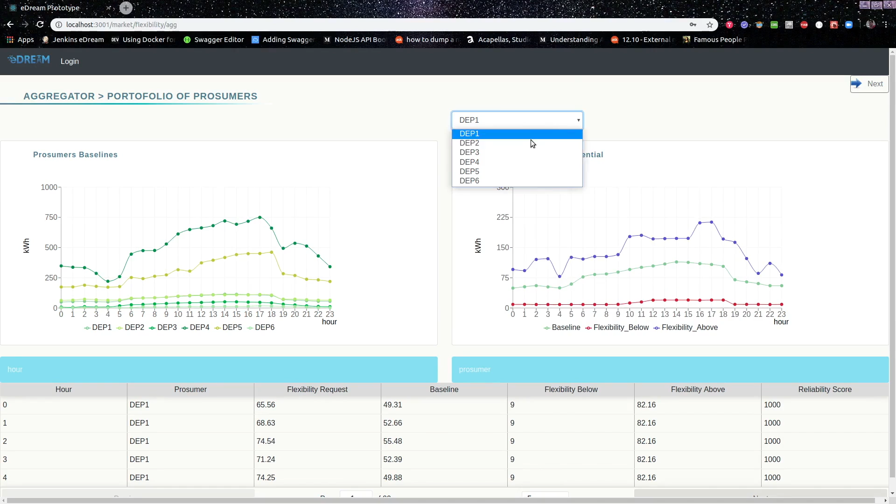In the case of the aggregator, the aggregator is able to evaluate the potential of each prosumer in its portfolio. So it can check the flexibility potential above and below the baseline. He can check the baseline of the prosumer. Then, based on the flexibility request received from the operator, he is able to construct the flexibility delivery based on the portfolio and the amount of flexibility that could be aggregated from its prosumers.

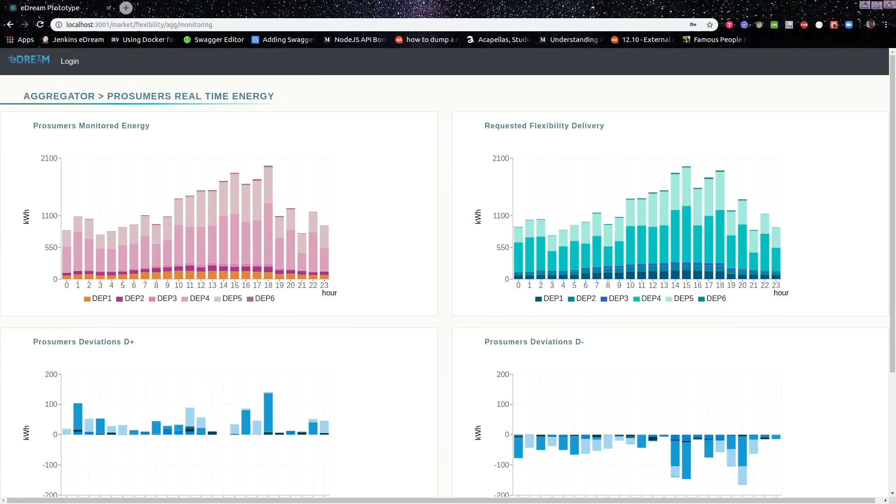Using the smart contracts and the blockchain, this is automatically injected in the smart contracts of the prosumers that regulate the prosumers' behavior. And in near real-time fashion, it is able to assess the amount of flexibility delivered by each individual prosumer and also the deviations from the expected amount.

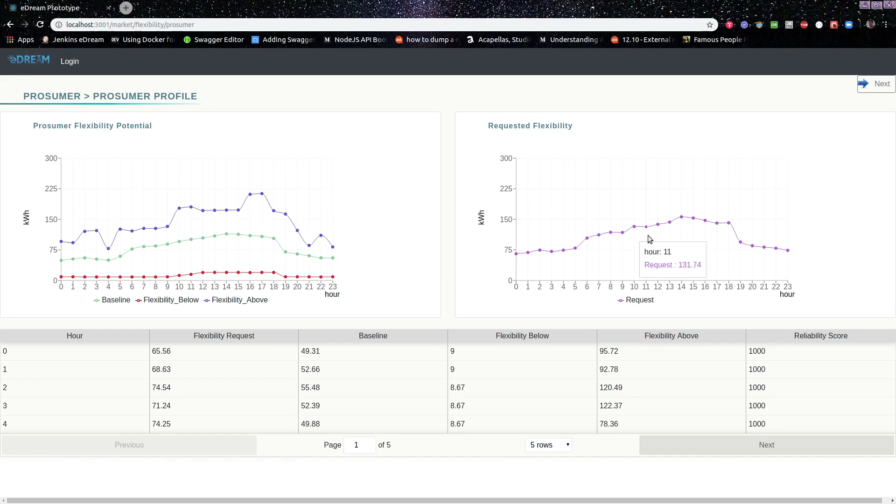In terms of the prosumer, the prosumer can have multiple options. In this case, he can see his baseline and estimated flexibility potential. He can see the flexibility request injected by the aggregator in his contract. And during delivery, the monitored energy data are registered on the blockchain.

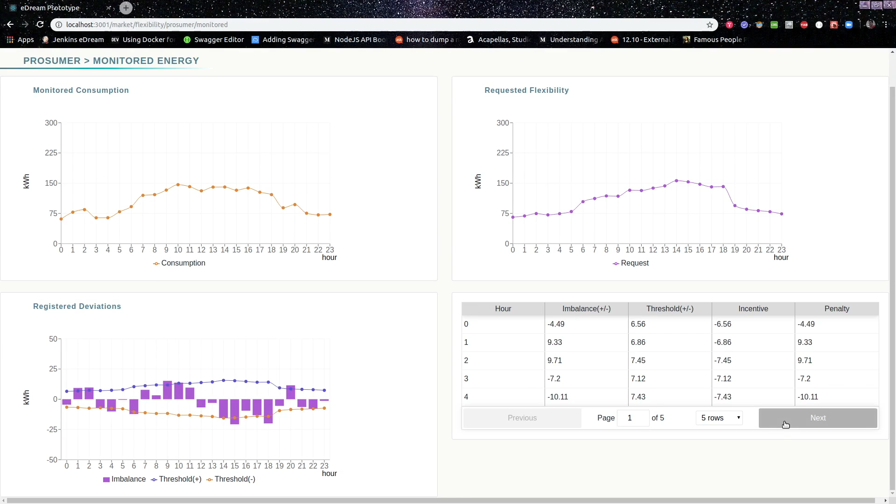Based on that information, the assessment of the deviation compared to the required flexibility is done in near real time, and also in near real time the settlement of energy imbalances and the financial settlement of the service is done. Okay, so this was my fast-forward demo presentation.

You want to play the other one, or you're finished? No, it's okay. I think the main ideas are presented. So there's no questions from the audience. I'm just curious, is that going to be open source, or is the prototype you're demoing a commercial platform? It will be open source, and the demo that you have seen is based on the Terni pilot.

So in the Terni pilot, we are testing these functionalities of having blockchain as a technology for decentralized control. Of course, there are challenges because blockchain is well known that it is not that good in terms of scalability and privacy of the data, but we have managed to overcome these problems.

We have developed some second tier solutions, they are called, based on blockchain, that achieve very good scalability, and also for the privacy of energy data, we have successfully integrated zero knowledge proofs, allowing the validation of the service to be done without disclosing the energy consumption data of the prosumer.

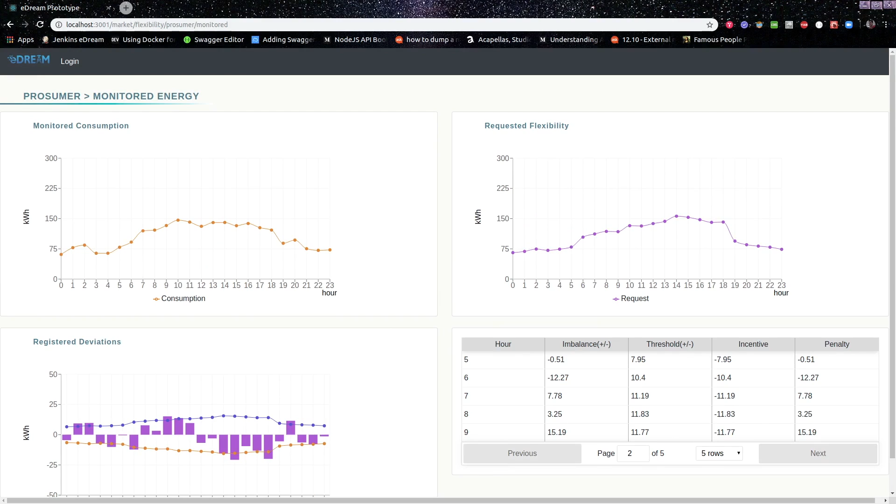All right, wonderful. So next up, we have Emmanuel Onillon from CSEM, which is the Swiss Center for Electronics and Microtechnology, and he will be presenting the TABEDE project. Thanks, Zia. So, the TABEDE project, let me put my presentation in full screen.

So, first I will give a quick overview of what TABEDE is about, why TABEDE, what is the context around, a brief overview of a proposed technical solution, what are our test plans, and what would be our next steps. So TABEDE is a 3.5-year project funded by the EU, and the main goal of TABEDE is to allow a building equipped with a building management system or energy management system, or without a building management system, to be able to integrate energy grid demand response schemes. So to make buildings demand response ready. That's the ultimate goal of TABEDE.

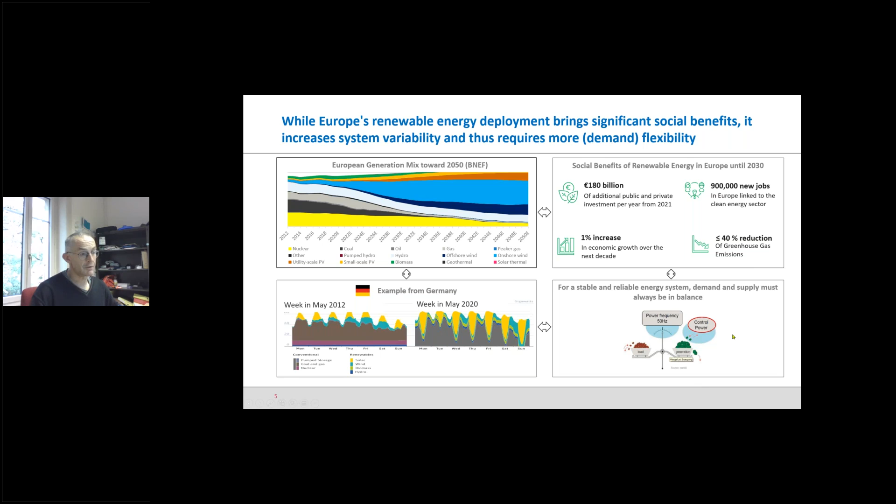But with all this power, we need to find a good equilibrium between generation, load, and storage. And this is why we need TABEDE. We have plenty of buildings that cannot enter demand response schemes, that cannot take advantage of their flexibilities, and that's what we would like to achieve thanks to TABEDE. So the main goal is that consumers can support the grid by valorizing their flexibility and local assets. In the near future, there will be more and more flexibility, more and more deployed small-scale batteries, or even batteries in electric vehicles. And TABEDE would like to allow the consumers to take advantage of that.

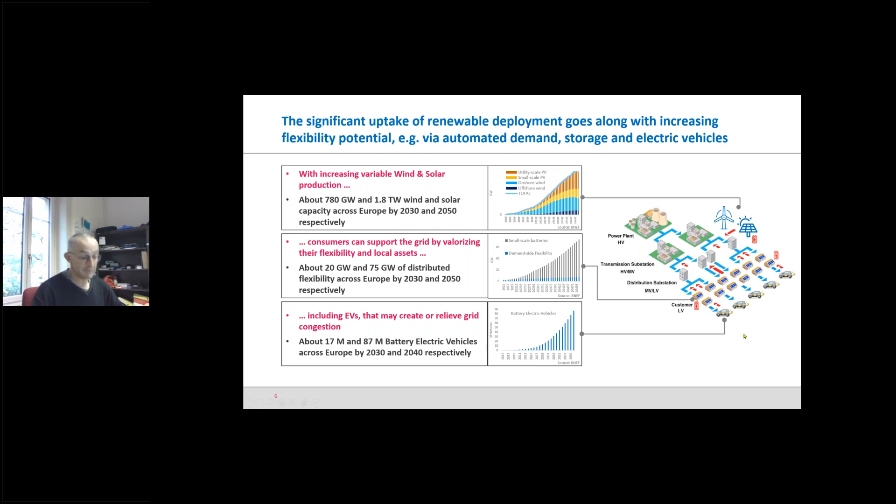What is our proposed technical solution? We are developing what we call a TABEDE extender, to extend existing building management systems. For that, the extender has 4 main objectives. At the end of the project, we target TRL 7. So we won't have a product, but it will be really validated on our 3 main test sites.

So one keyword in TABEDE is interoperability. We discussed a lot yesterday morning about interoperability. So the idea is that TABEDE can discuss with several demand response communication protocols. It can easily be deployed in the cloud and can easily discuss with several appliances.

Thanks to that, we shall be able to improve demand response capabilities. So we would like to be able to send set points to existing appliances. We want to create a database of appliances so that when someone deploys a new appliance, we can fetch the driver for that appliance, and so that that appliance can take part in the demand response scheme. And we have all the communication protocols stored in that database. We are currently validating TABEDE on 3 test sites, and it's already working well on 2 out of 3.

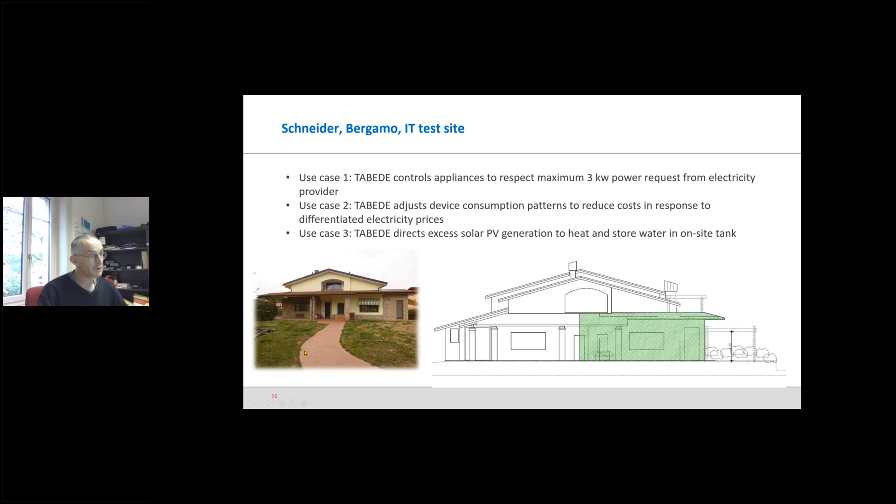Second test site, Bergamo, Italy. A residential building, we have different use cases. The first one is a law in Italy: we have to respect a maximum 3 kilowatt power request from the electricity provider. Then we want to adjust the building consumption, and then we want to decide what to do with the excess solar PV generation. In this building, there's a large water tank in which we can store energy.

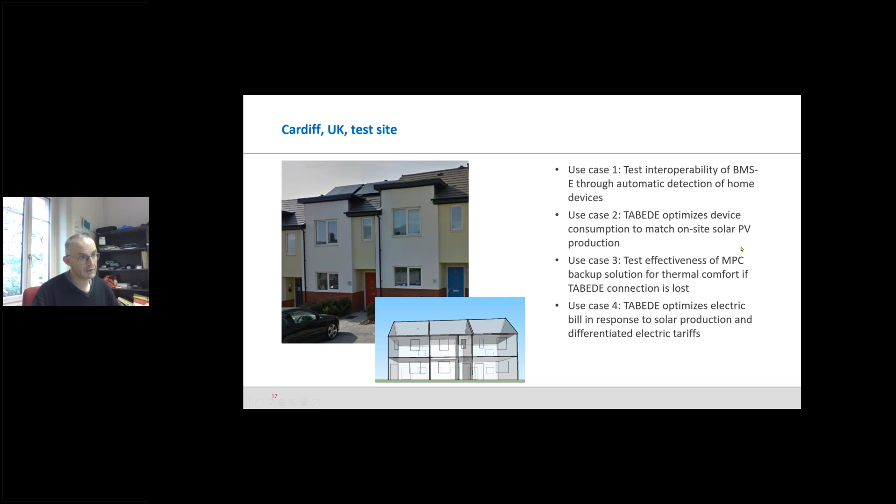Last test site, the Cardiff building, in which we have also 4 different use cases. So here, of course, we want to see how the building will behave with respect to demand response orders, but we want also to validate the model-based predictive control solution.

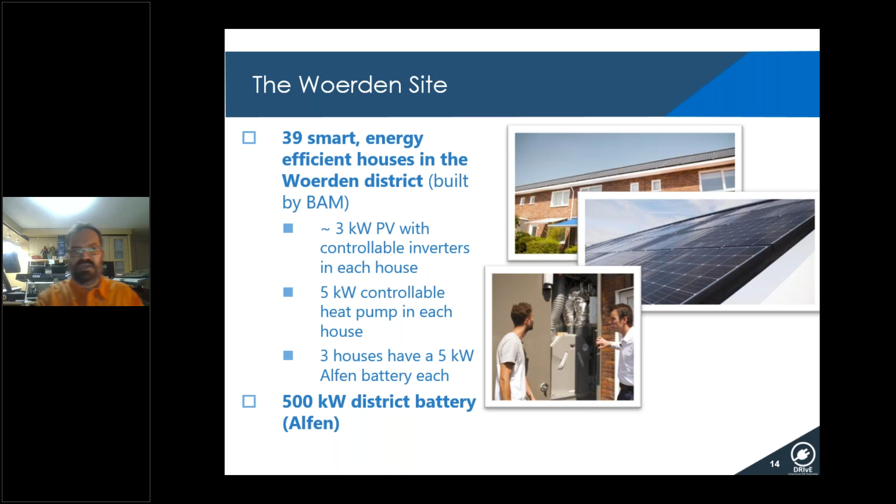So I mentioned the Woerden site has 39 smart houses. They look like this. They have PV panels, each house 3 kilowatts. The inverters are controllable, but initially we were not allowed to control them. There are 5 kilowatt controllable heat pumps, and some houses have Alfen 5 kilowatt batteries, and there was also a big district battery installed, 500 kilowatts.

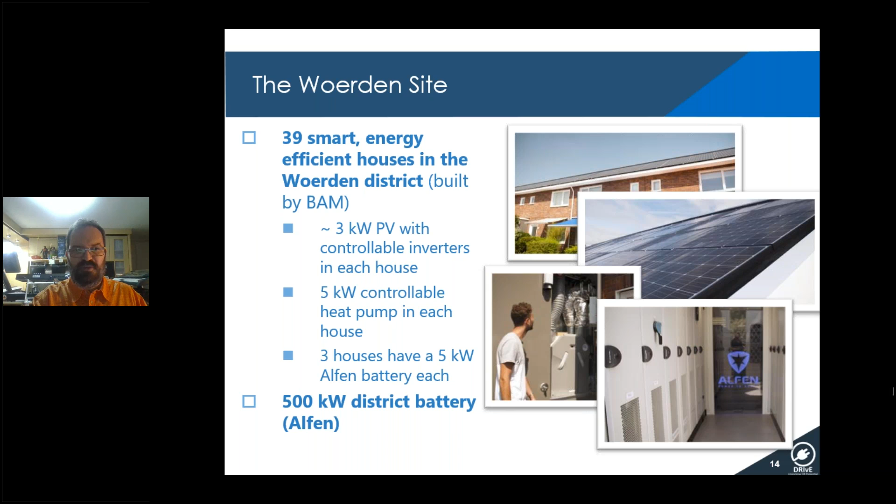When you need to implement DR, one of the biggest problems with implementation is that you claim that you can do everything, and you are supposed to then simply start testing it. But there is a big reluctance by building owners, site operators, everybody, whether this physical testing will work as planned. So if you look at physical testing like this, we have our drive with all the DR capabilities, additional services, and you then have to control physical devices through your gateway. These are usually Modbus controls, and of course you have human beings interacting with these devices and setting the reference values for indoor temperature, etc.

When you do physical testing, there is a possibility that your actors may get angry because there's no hot water and they want to take a shower. But that's not the biggest issue. They will forgive you after some time or forget. There's also a possibility that due to unplanned behavior of your control algorithms, you can fry the inverter. The inverter can catch fire and then you can damage stuff. The digital twins proved crucial, at least in some pilot sites, to de-risk and provide confidence to site owners that everything is going to work.

So when we say digital twins, some people would call it hardware in the loop or hybrid cyber-physical testing. So we have the same infrastructure, the drive logic is the same, execution platform is the same, gateways are the same, but instead of real pilot sites, you are controlling the validated models, digital twins of all the assets that you can control in the pilot sites.

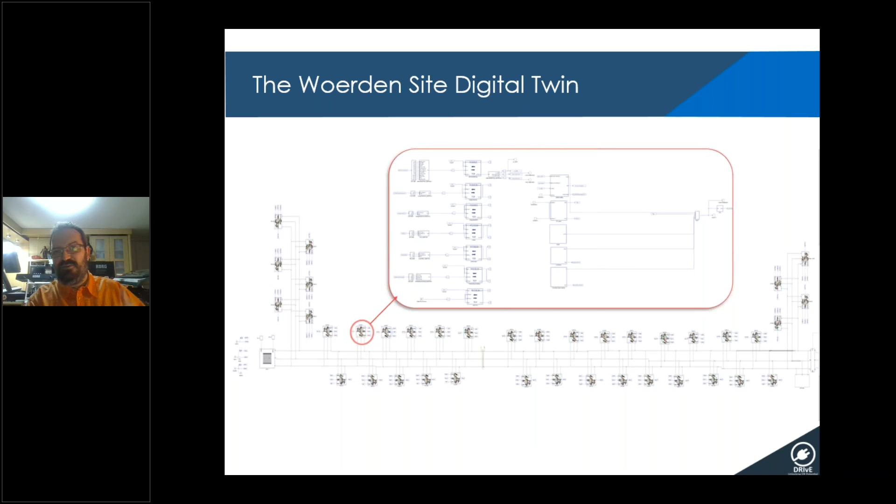So for the Woerden model, this is what the model looks like, but on the surface. Each house is one block, but when you click on each house, this was done in Typhoon software, but runs in Enervalis premises, you actually have additional signal processing and the models of inverters, models of heat pumps, etc., together with control logic. And this is what it looks like at Enervalis premises.

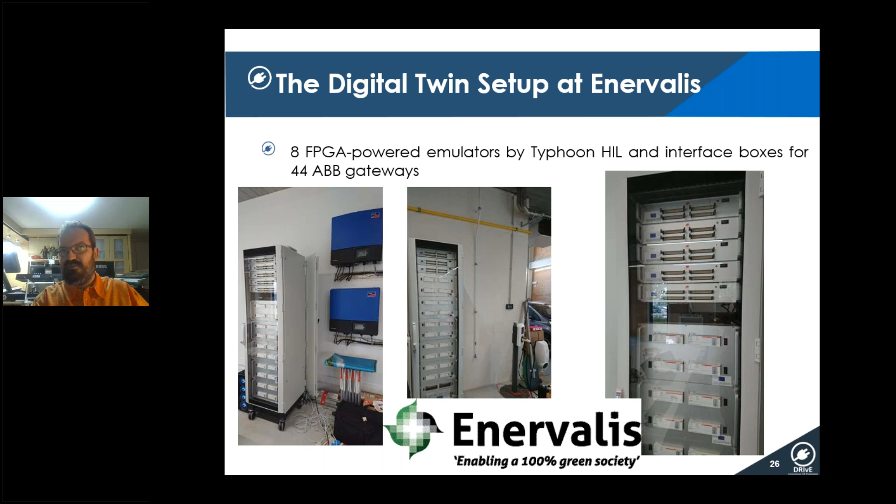So we have real-time emulators with ABB gateways that you use at real pilot sites. So the top layer are emulators, the lower layer are gateways. So the drive in the sandbox mode thinks it's controlling the real assets, but it's controlling actually the models. So this setup allows us to run parallel models, to try portfolio management changes, to do benchmarking, etc.

And then we can visualize everything in Grafana. We can see test results in Allure. We set up everything so that it's remotely available to all partners through GitLab Pipe Runner. You just say, I need a COMSA model for 2 days, run it, and you run your MPC or mass optimization there.

And for example, for Woerden, this is how we did congestion management, frequency control, voltage control, power quality, with 39 houses, so that there was a confidence that we should be allowed to control inverters, for example, which was not originally planned. The similar thing happened with the COMSA building, where the building manager wanted to see in the digital twin that our control messages will not mess up the building management system, and we managed to prove it to the building manager.

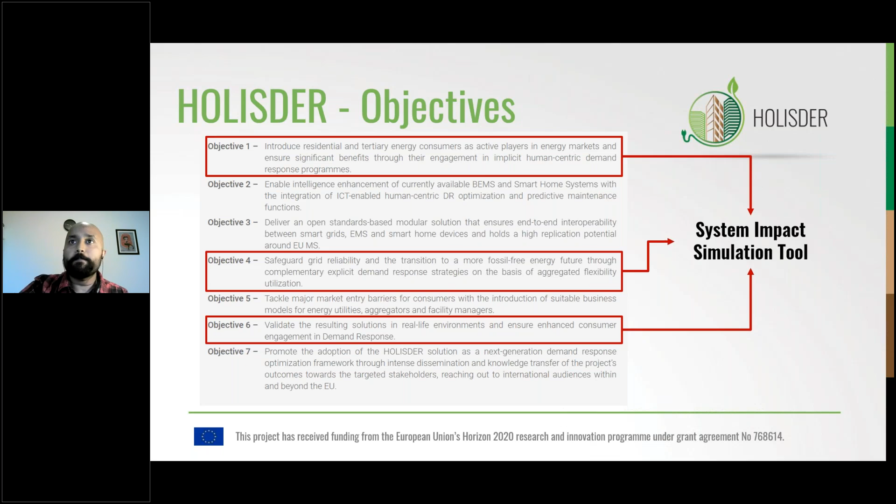Our motivation, yes, I think this is something that is more known to everybody who are working in this domain. We are moving towards a carbon-free system, both in the transmission side of the electricity network and the distribution side. Within the distribution side, one of the things we see are the adoption of a lot of technologies like PV panels, micro CHPs, batteries, etc., by residential and commercial users.

What happens as a result of this is distribution system operators expect to see increases in operational issues such as power quality management, like over and under voltage issues, congestion management, handling overloading of assets, etc.

One of possible solutions to mitigate this problem is automated demand response, and then that being done to flexibility sources within the distribution network. Among all the flexibility sources within a distribution network, this particular use case that I'm going to demonstrate focuses on commercial buildings as a potential source for flexibility in the distribution network.

Why commercial buildings? Well, they account for around 11% of the total energy consumption in the UK and EU, and 18% in US. This is according to statistics from 2003. You can easily assume that within the years that has passed since this data collection, the energy consumption has only increased. HVAC, which stands for heating, ventilation, and air conditioning, accounts for 50% of this energy usage within the

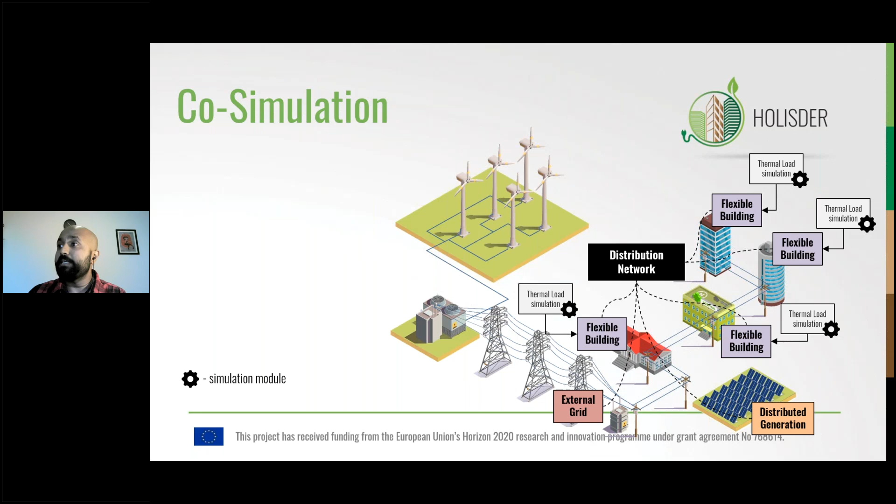The flexible buildings would take that information and convert that into a sort of flexibility that the aggregator can understand. The aggregator, having aggregated all of this flexibility, then talks to the DSO by means of a grid simulation. A grid simulation gives the DSO an insight into the state of the physical distribution grid itself, and the aggregator in this case is responsible for

balancing the network as well, so determining how much energy is to be imported from the external grid, how much of it can be used from local production, and it determines a sort of demand supply solution which balances the distribution network. This solution leads to consumption or production of many different flexible assets within the distribution grid, and this actuation is actually fed into a grid simulation so that the DSO can observe what happens to the state of the network if this demand supply solution was actually actuated.

The aggregator and the DSO then take part in a sort of iterative communication with each other, where the DSO observes the grid simulation and identifies if there are voltage problems in any part of the network and informs the aggregator, hey, there is a problem on this part of the network, do something about it. The aggregator, with information about flexibility in that particular node, can actually tweak or change the actuation at that particular node, perform a new balancing, and then feed this information again to the grid simulation.

Now this whole step repeats again for the next time step, which is maybe an hour or 15 minutes, depending on how often flexibility needs to be aggregated within this simulation. A small introduction to the technologies we are using within this simulation. As I said, there were 3 simulation modules that we depended on.

ESSIM is an open sourced simulation tool and collection of models which was developed by TNO and open sourced recently. It is a discrete time simulation tool. What it does is it calculates energy flows and performs balancing of multi-commodity networks. In this particular instance, we are using this feature of ESSIM to simulate for us the work of an aggregator. Another advantage of using ESSIM is it can interface easily with other simulation tools and models, and this is something that we use for plugging in the EnergyPlus models.

EnergyPlus is a simulation model that simulates thermal zones and solves HVAC system responses, also taking into account radiant and convective effects of interaction between thermal zones and the environment, and gives you calculations such as energy consumption of a particular building at any given point of time, given a certain set of parameters such as glazing, insulation, the heating and cooling set points that you've set, what sort of ventilation is applied, what devices are used for heating, such as a heat pump or district heating, and so on.

Another place where ESSIM, the aggregator, interfaces with is OpenDSS. OpenDSS for us provides the grid simulation. So given the demand supply solution at any given point by the aggregator, this information can be fed to a network that is modeled in OpenDSS, and OpenDSS can calculate the power flow in the electrical distribution network, and then this is the state of the network that is observed by the DSO itself.

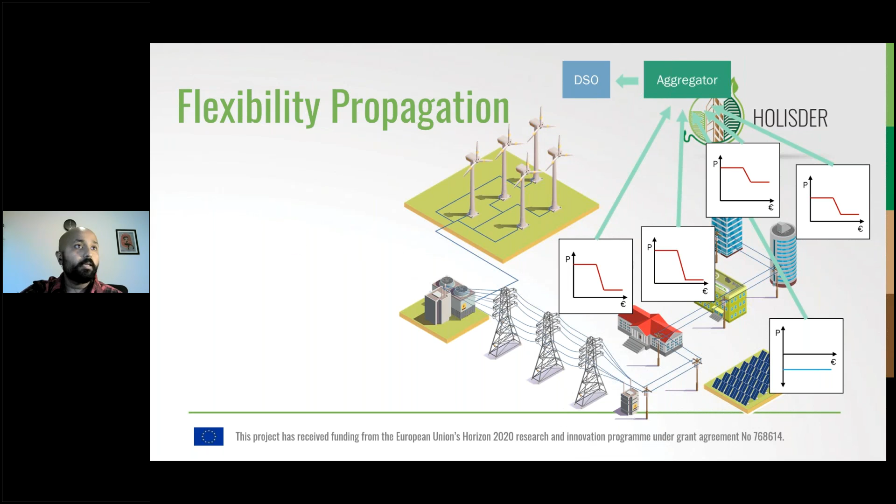Now, in the second part of the aggregator's working, it sends down a price signal. The price signal is something that each of the actors can use along with its bid curve to determine how much it has to consume or produce at a given point of time. Now, in a normal situation, this seems fine. The given prices are sufficient for all of the actors to act on the flexibility that they have promised to the aggregator.

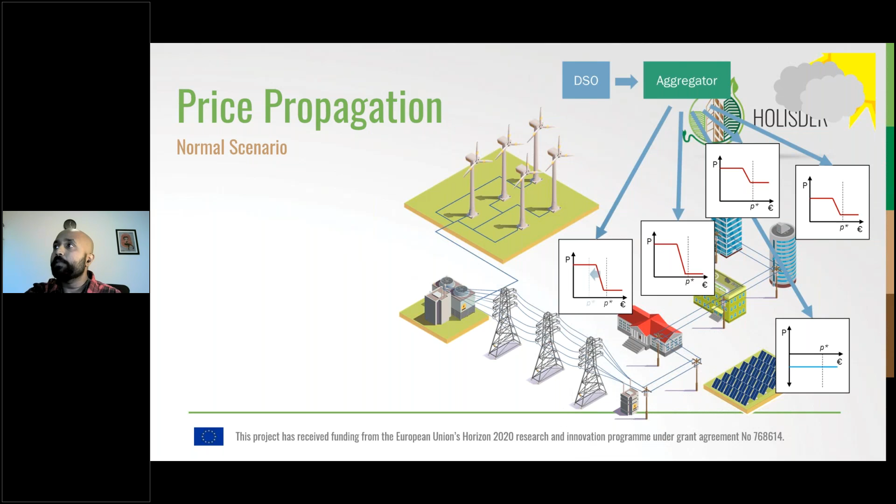However, things get a little complicated the moment some issues occur, such as on a very sunny day when there is overproduction of energy from the solar. At the PV park, we see that there are over voltages on 2 nodes of the network and normal operation on the other nodes. In such a situation, the aggregator, after consulting with the DSOs during the loop that you saw earlier, could incentivize these actors to consume more than what they originally wanted. The relationship that you see with power and voltage in a network is that by incentivizing consumption, you can actually bring the voltage down.

The same thing happens with under voltage as well. So in situations when there is under voltage, the aggregator can incentivize production or de-incentivize consumption to try and solve under voltage problems in the distribution network.

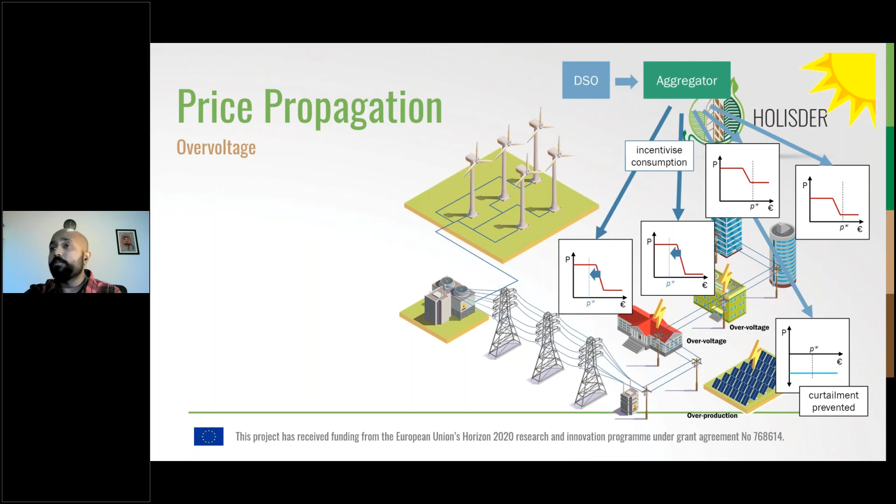Now, within the scope of the HOLISDER project itself, there are a total of 4 pilot sites across the globe. One of the sites was in Finland and involved a commercial building. And what we did was, talking to the partners who were involved in this particular pilot, we could get some measured information. This was from sensors within the building itself and some known information about the building itself.

We took that into account along with the assumption that this building, which was now being heated by district heating, would convert to an electricity-based heating, such as a ground source heat pump. Now, the reason why we assumed this was so that we could manipulate the flexibility provided by the thermal mass of the building in the electricity market. So it was possible for us to assume that an electrification happened.

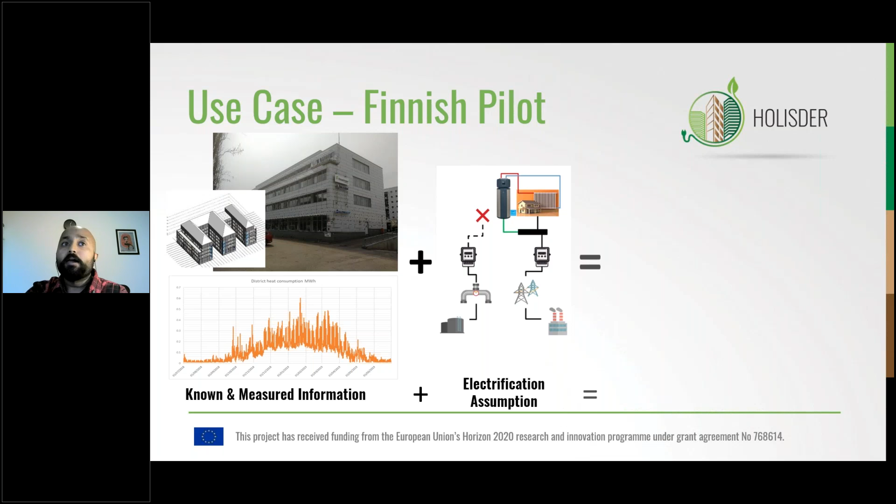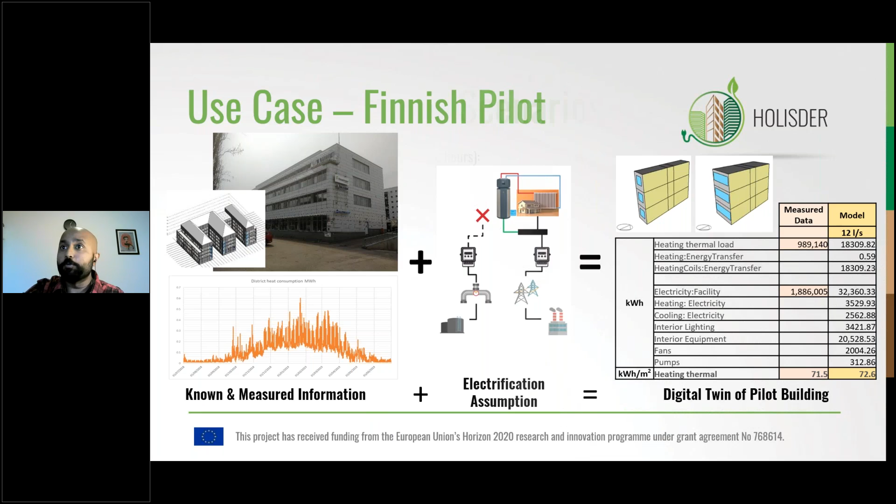With this information, we could build a digital twin of this pilot building, which showed an identical consumption pattern to the Finnish pilot building, but with the assumption that it would provide this heat by means of a heat pump. Now, in addition to this information, we also needed to come up with certain scenarios for driving the HVAC system. So there was a base case, which was from literature.

We found out certain set points in heating and cooling and ventilation rate, and then came up with the consumption, which was similar to that in the digital twin of the Finnish pilot building itself. What we wanted to vary were these 3 parameters, but we also needed a KPI to confirm that by varying these parameters, we do not bring discomfort to the occupants of the building itself.

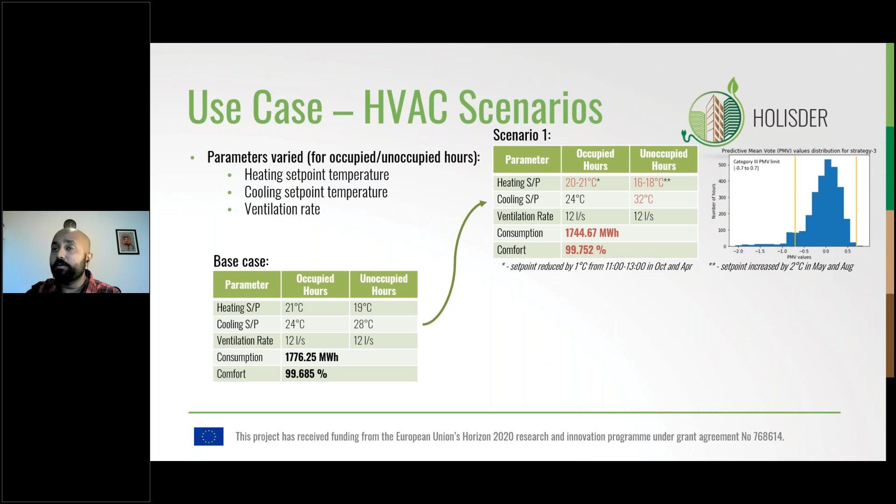So we took into account the comfort that is calculated within the model itself on a scale known as PMV, or predicted mean vote, which is based on the Fanger model of comfort within the building itself. So the aim was to come up with a couple of scenarios where we changed the set points such that the comfort level remained the same, or in this case, actually improved. Not only did it improve, it also gave us a lower consumption of electricity for the same building.

And we came up with another scenario as well, which was within the same comfort range as the original base case, but again gave us a lower energy level. So with a total of 3 energy levels, we had three flexible states that the building could shift to if and when requested by the DSO.

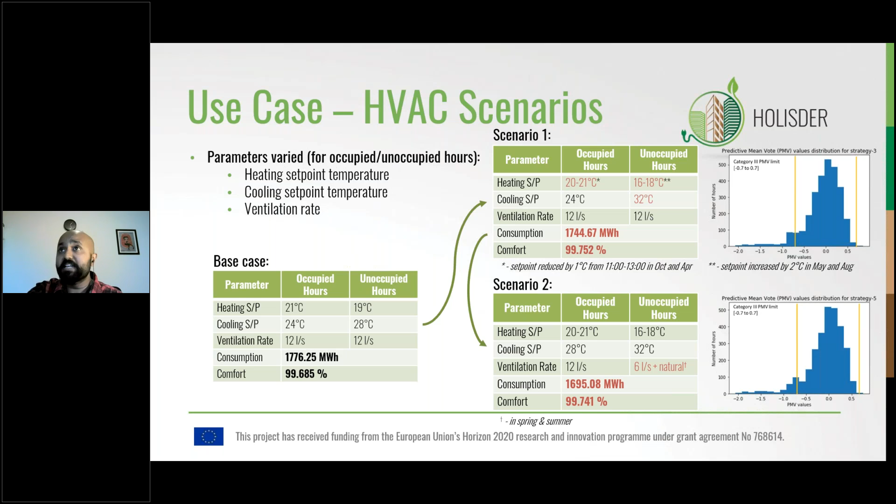Now, extending this particular building, we also created 4 more buildings which are not identical but changed in behaviors, in parameters, such that they were different in building square footage, so that the demand varied. We also changed some of the parameters inside, so it represented 4 different kinds of demands within the distribution network.

We also added a PV park in there with a generic PV park profile, and also some line parameters so as to make a sort of fictitious distribution network that we could simulate and then test our algorithm to see whether it was possible to trade flexibility services with the DSO.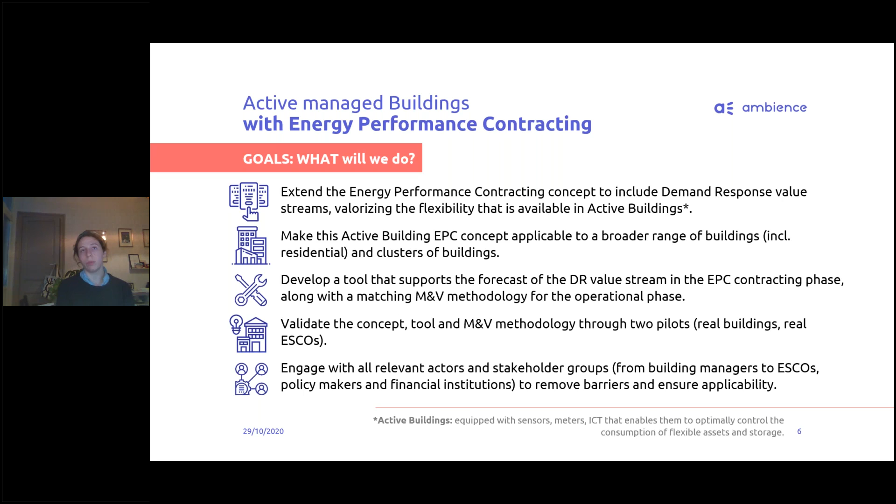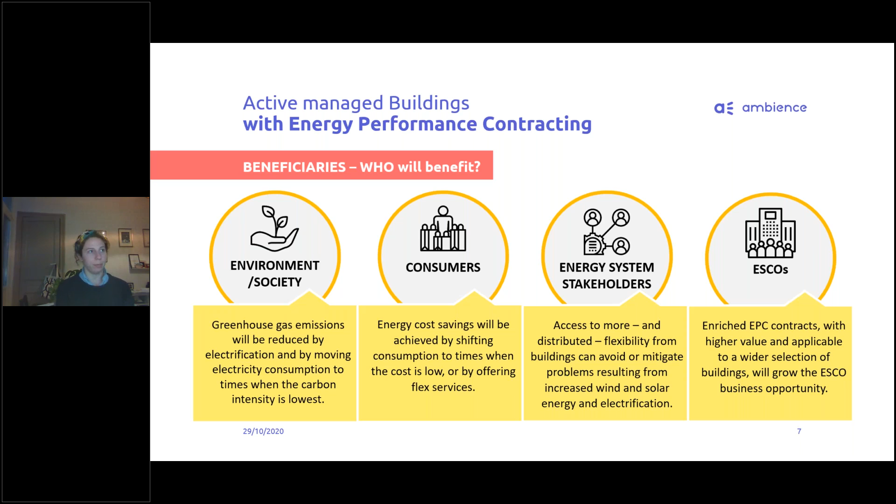We've been conducting an analysis of our consortium partner countries, but also the EU at large, to see how developed the market is and what regulatory barriers there are in place for implementing or including demand response. So just a bit about the beneficiaries of the project. So we've, of course, the environment and society as a whole as the main objective here. Consumers and energy system stakeholders, and then ESCOs as well.

So a bit about our project, a bit about our pilots. We've got one that is an office building in Porto, in Portugal, and one that is an office building in Brussels. So both office buildings to test the solution.

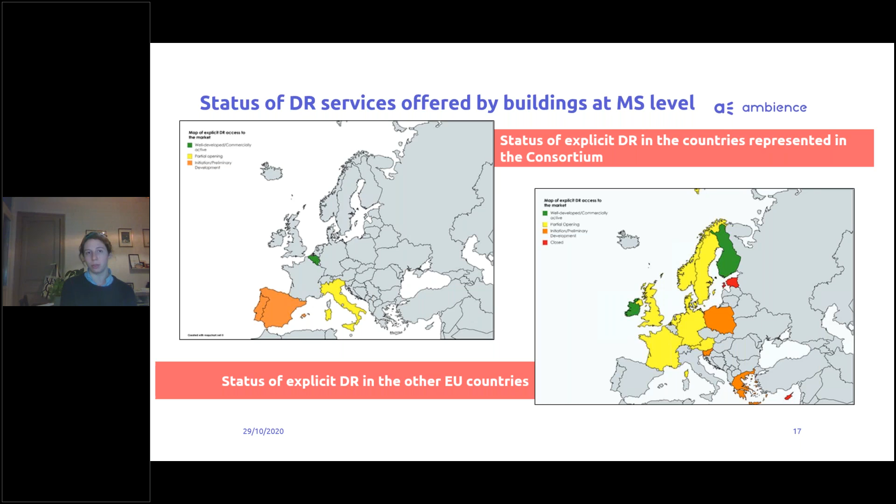And again, Portugal was sort of Spain and Portugal together, so it needed quite a bit more push when it came to regulatory measures, or an assessment of the regulatory measures happening at the national level to open it up to demand response. And that brings us to the end.

Wow, what a great market analysis, Jessie. That is fantastic. Thank you. I'm so glad you presented that. I have to say that I'm going to use those in several deliverables. Great. Sorry, go ahead, please. I highly recommend checking out the deliverable. There's also on the website fact sheets that give a very good recap of the individual consortium countries that were looked at. So they might be a good source for information as well. Yeah, it's a common practice to assess the readiness of the partner countries. And so you did a really great job on that. Congratulations. Thank you.

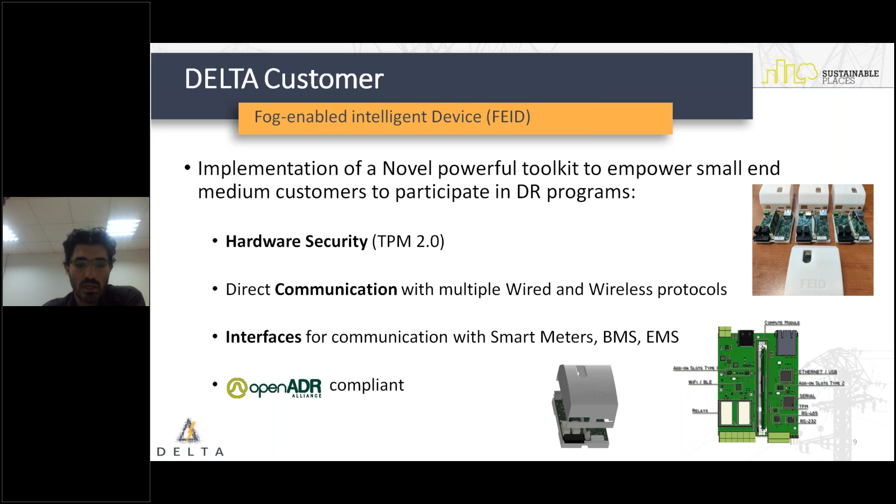We have enhanced security with an embedded TPM module. We have direct communication with various wired and wireless protocols, and of course interfaces for smart meters, building and energy management systems. And of course, as said, we are OpenADR compliant. You can see here the new device.

On this device, we are running a series of lightweight software engines, starting with load and PV forecasting. We also have a new approach for flexibility estimation. We combine unsupervised and supervised models in order to be able to extract the flexibility potential of a customer from a central point of measurement without getting into more detail on asset level.

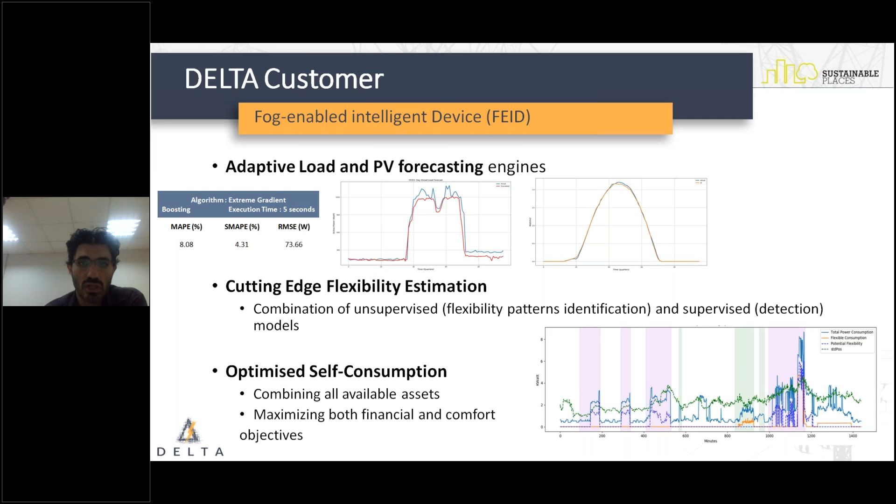And of course, by having all of that information, we are able to deploy and optimize self-consumption logic that combines all available assets without the aggregator having knowledge over it, and of course, maximizing both financial and comfort objectives from the customer side. Getting all of that information reported to a higher level, a virtual node that follows the virtual power plant principles. We have a multi-agent framework that provides a highly robust DER management.

There's an internal clustering feature that uses flexibility, availability, reliability, and other metrics in order to efficiently find the most appropriate customers to handle a DR request from higher levels. We perform a cross-validation on all forecasting through individual and aggregated results. So we get the individual results, and based on other algorithms that are executed at aggregated level, we are cross-validating the results. So we can report to the aggregator a result that is as close as possible to the actual thing. And of course, we have an intelligent optimal dispatch and fail-safe mechanism to ensure DR success within each virtual node.

This is quite interesting because, first of all, we introduce flexibility as a virtual distributed energy resource. So imagine all optimization schemes that are applied on DERs that can use now flexibility as one of them. So we use that to test the various optimization schemes for DERs in the literature.

And also we introduced two fail-safe mechanisms, one intra and one inter-DVN communication in real-time operations, so that we can identify when a DR is going to fail because one of the customers cannot deliver what has been requested. We quickly find other customers that have the flexibility and are available at that time to deliver that amount with explicit DR requests, in order to get that either within the same node or to other nodes that fulfill certain constraints.

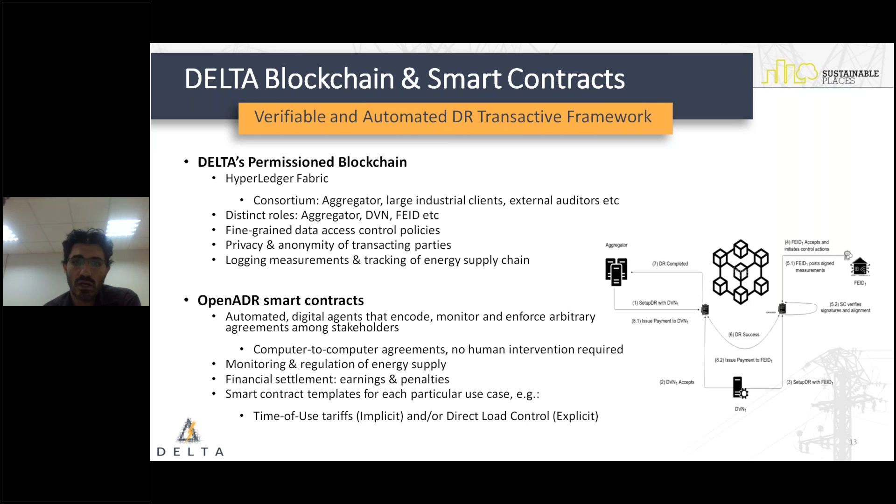So as soon as a DR request is serviced to either of the layers, a smart contract is created, and either if it is rejected or failed or successful, everything is handled automatically by the engine on the back end. So as you can see, I tried to make it as brief as possible to give more time for questions.

Delta envisions to harness the untapped potential of small and medium customers by providing a framework that can automate, but also secure and make more efficient demand response management, while also creating added value services that can enrich the experience for the end users, raising their engagement and providing, let's say, more interesting approaches for them to actually participate

in DR requests. And through all of that, we introduce new business models and revenue streams for all involved stakeholders, starting not only from the aggregator, but also from higher levels up to the small customer.